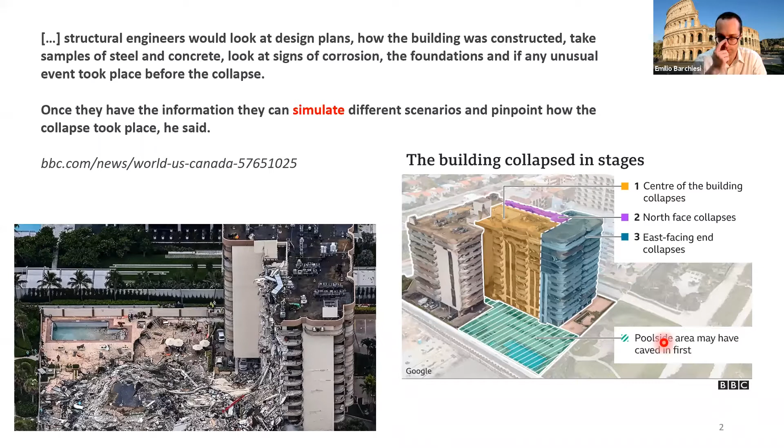I think it's not necessary to explain and motivate why we should study damage mechanics, but just to be on the safe side, note that in 2021 alone, in less than 7 months, we had more than 8 major collapses happen around the world, the last of which occurred just a few days ago in India.

Damage mechanics can help us save not only lives, but also improve our quality of life and reduce the costs related to building maintenance, so that buildings can always be safe for all of us.

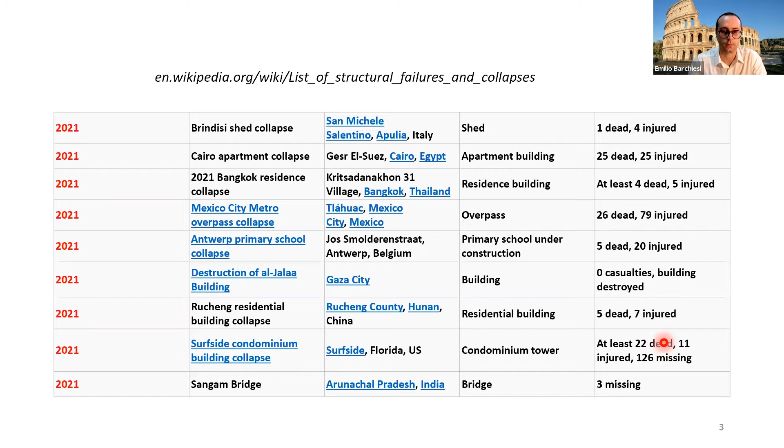So you have seen that these topics have a very close connection with our reality. But is this topic connected in some way to future short-term potentialities in Peru? Well, the answer is yes, because just recently the government of Peru launched a national infrastructure plan, granting 104 billion for the next 20 years to bridge Peru's long-term infrastructure gap. That is the main scope and the main challenge launched by the government.

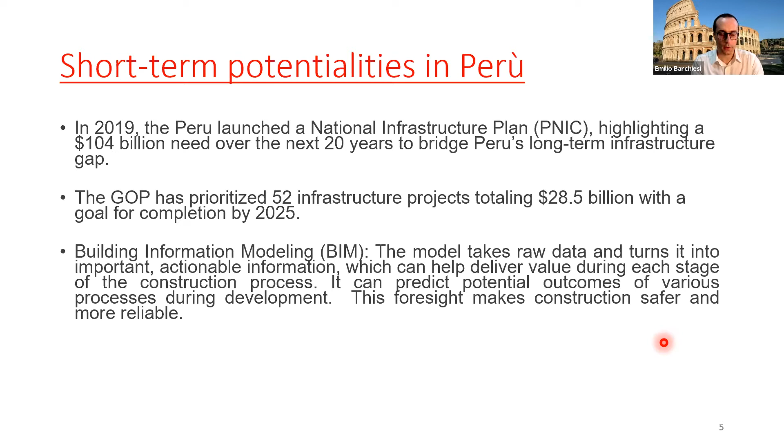In our work on damage, we face some everyday challenges. One main challenge is that damage occurs through a very wide range of mechanisms, because you have cementitious materials like concrete and ceramics. It happens in fibrous materials, either artificial, natural, or biological tissues, that can be part of composite materials, and it can happen in metallic materials like iron, steel, and aluminum.

All of these materials are connected with different applications, meaning different boundary conditions and problems related to the environment. For cementitious materials, you deal mainly with buildings.

If we talk about fibrous materials, you deal mainly with high performance transportation systems, because composites are widely used in cars and airplanes. While if we deal with metallic materials, very often we deal with large infrastructure, like bridges, for example.

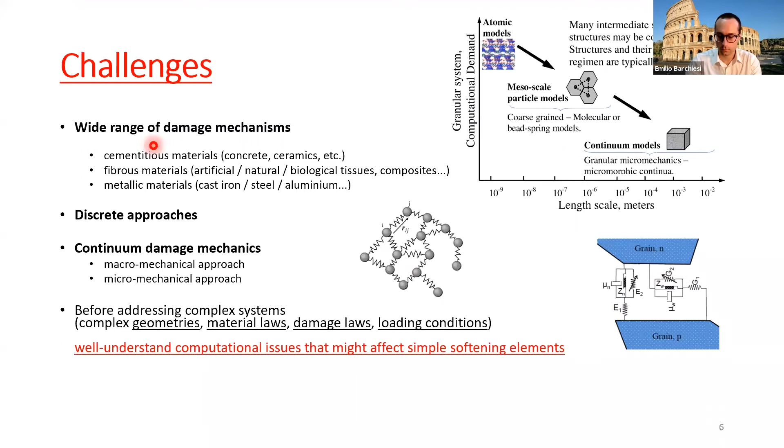So at first, I will briefly introduce the mathematical formulation. We'll deal with a single degree of freedom system with damage. Then we specialize this formulation to a simple damaging Hooke's spring. Then we'll see analytical solutions for such a case.

I'll go very briefly through some numerical methods that can be used to address this very simple system, so that you get a taste of what it looks like doing research in computational mechanics when we deal with discrete systems. Of course, very simple ones, but we work in real life with very complex systems. And then you'll get a taste of how applications look like.

We'll speak about grain-grain interactions, how these interactions can be used to have a discrete modeling of a masonry structure, including the fracture behavior.

Then we'll go through how we deal with brittle fracture using continuous models, and at the end, the more complex model you would be dealing with should you work with us, which is a model derived by homogenization of an elastoplastic damage granular material.

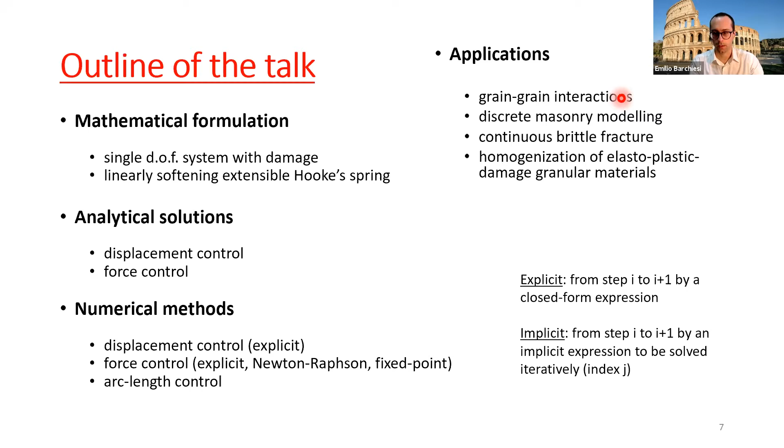So let me just say something in advance. Every time I say explicit, I mean that if we are in an iterative process, we go from step I to step I+1 just by a closed form expression, without doing any further iteration. While if I say implicit, that would mean that we go from step I to step I+1 through a series of steps, so there will be no closed form expression to go from one step to the other.

Well, so let me come to the formulation. Let us consider that time is continuous, which means that time continuously increases from 0 to the time horizon. We have a finite dimensional system having just 2 degrees of freedom. One degree of freedom is, say, u, which you can think of as a displacement. And the other one is the damage, which is simply denoted as d.

So this d is a kind of parameter which is not only expressing the extent to which damage is affecting a material, or in this case, just a system, because this is a global parameter. But it also gives a way to encode the irreversibility of this damaging process.

And how is it encoding this damage irreversibility? Well, through a condition. This condition reads as: damage can only increase in time. So whenever we look for a damage trajectory, which is a law of evolution of damage, we look for an evolution of damage such that damage is only increasing in time.

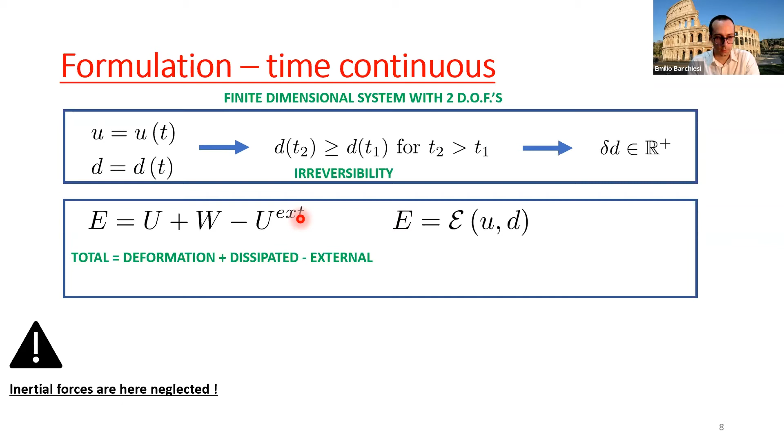Then we equip this system with an energy. As we work in a Lagrangian framework, so we use Lagrangian mechanics, we define a total energy functional for our system. So the total energy functional reads as the sum between the deformation energy of the system and the dissipated energy. Then we subtract from these energies the energy which is entered from the outside, so the external energy, which is nothing but the work done by external forces acting on our finite dimensional system. Note that throughout this presentation, I will neglect inertial forces for simplicity.

So then let me define what is the first variation of this energy functional. The variation of the total energy is nothing but how the energy is changing from a given state, U, D, if I perturb it a little bit. Actually, I perturb it by a very infinitely small quantity, the energy. So I take a state U, D.

I perturb it a little bit with admissible variations, and I see how the total energy is affected by this change. Then I perform the limit for this perturbation, the amplitude of this perturbation, to go to 0, so that we consider this first variation of the energy as nothing but the variation of the total energy for admissible variations of the kinematical descriptors, which are U and D, having arbitrarily small amplitude.

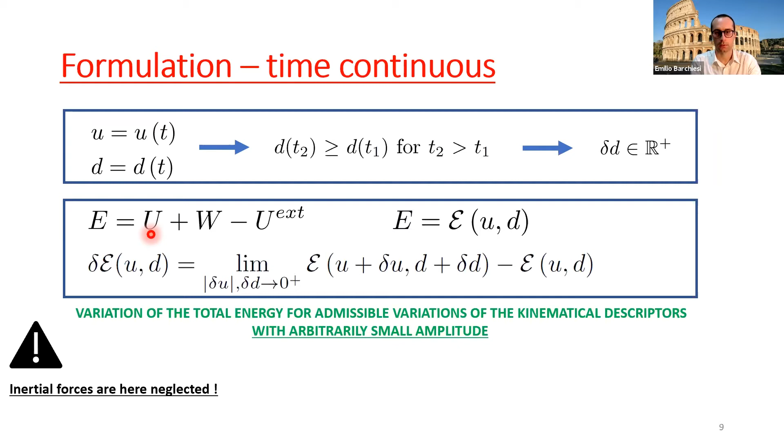Well, at this point, we can introduce, I think, the most mathematical thing you will see through this presentation, which is the maximum energy release rate principle, which states nothing but that the release of energy, which is actually occurring at any time instant of the evolution of the system, is the greatest possible among all the admissible trajectories.

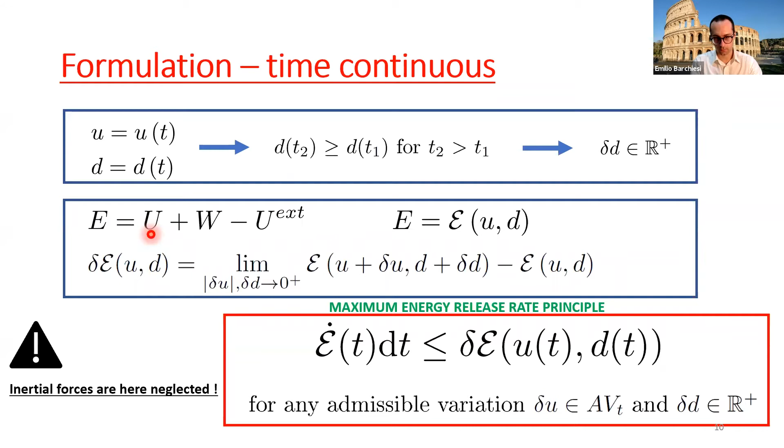So this is just a principle, we accept it as it is. Actually, this principle was formulated in 1948 by Hill in a very famous paper, and all our tractation is framed into this variational principle.

Here we just discretize in time the formulation, which is we define time discrete equivalent quantities to those which I have introduced before. So time just gets discretized into many intervals so that we can use algorithms to solve the problem.

Well, the problem is find U and D such that they verify, for each time instant, this maximum energy release rate principle, which is here.

Now we specialize our tractation to a very specific simple case, which is the case of a classical spring which is linearly damaging. So we choose as elastic energy just the square of the displacement of the tip of the spring, which is the displacement of this point here, while this point here is fixed.

Then this is multiplied by an undamaged stiffness, KEL, and this stiffness is in turn multiplied by what we call customarily in damage mechanics the stiffness degradation function. So if this is damage, when this is 0, the rigidity, the stiffness of this system, is exactly KEL. While when D increases, then KEL decreases until eventually it goes to 0.

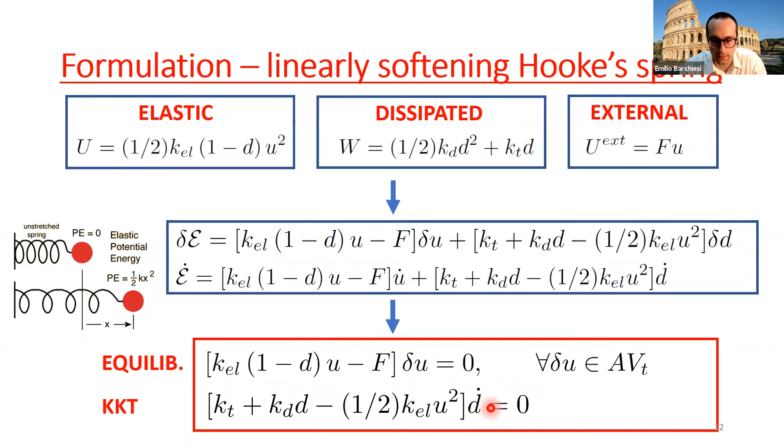Well, but you might argue that it's not given that solving this equation will give an increasing in time damage. Well, that's true. Indeed, if equating this factor to 0 you get that damaging is actually decreasing with respect to the previous time step, then actually damage is not evolving, because we know damage can only increase. And so d dot equal to 0 is entering into play.

Well, so now if you enforce displacement on the right tip, and we call this displacement control, it means that this equation here is automatically fulfilled, because delta U is 0. And then you just have to solve this factor equal to 0 for the damage variable.

Well, this is straightforward, because you just get that D is equal to this guy here, which is the elastic energy without the damage correction, minus KT, which is a kind of threshold parameter controlling the damage yielding, so the onset of damage, divided by KD, which is nothing but a kind of resistance to damage.

The greater KD, the lower damage occurs. The lower KD, the quicker damage evolves. So, well, we enforce displacement using this law: alpha is a positive parameter, t is time, so displacement is increased.

So if we know displacement, we can automatically compute the force through Castigliano's theorem. Here we load the structure, increasing the displacement. Force is linearly increasing until a threshold, which is controlled by this parameter here, KT.

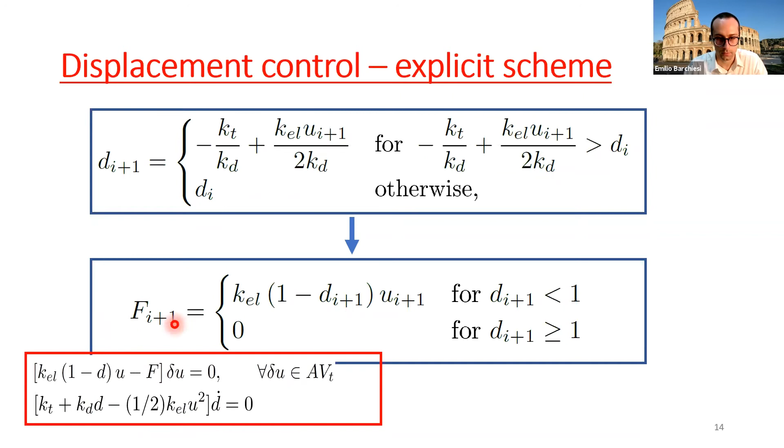So if you have force control, which means you control the force, you apply a force on the right end of the spring, an extensional force pointing toward the right, then you can still find analytical solutions, but these analytical solutions will be a bit more complex.

Why? Because if you solve this time here the damage for the displacement, you get damage as a function of the displacement. But remember that here displacement is not fixed, so you still have to solve for displacement. So you plug the damage that you have found as a function of displacement into here. And you get a third order algebraic equation for the displacement when the force has been fixed.

Of course, a polynomial equation of third order admits three solutions, and not all these solutions might be admissible or even real.

So in fact you get three solutions. Here you have the displacement versus time plot for each of these solutions, which are in green, yellow, and blue. Then you have the damage versus time for these three solutions. As you can see, the blue solution is unfeasible because damage is greater than 1, which is impossible.

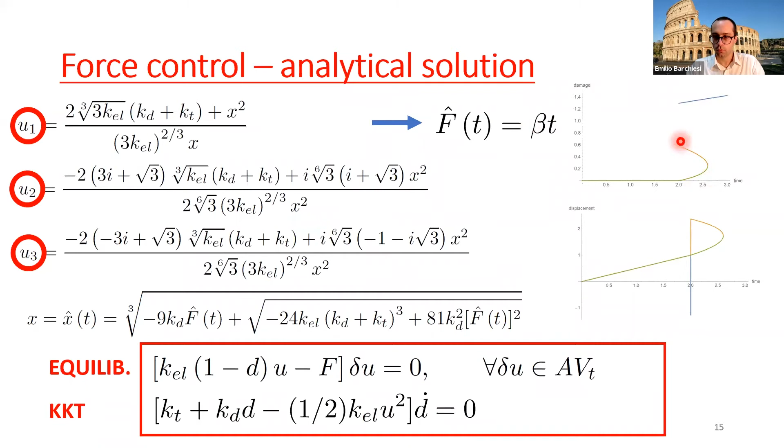Unfortunately, as we are in force control, and this force control has this law, force is increasing with time, we cannot come back because time goes on. But should we have a force such that it can decrease even if time increases, then we could come back here and see the whole solution that we were observing in the previous case, the displacement control.

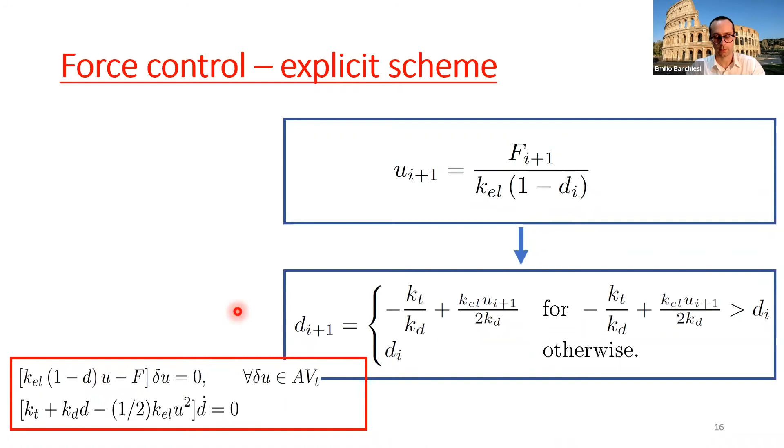So also for the force control, we have an explicit scheme: you fix the force here, then you take damage at the previous time step, and you solve for the displacement. You plug the displacement here, and you compute the damage for the next time step, and then you repeat this iteratively. That's very easy.

I go through these quite quickly, but then we have also Newton-Raphson. You have for sure heard this method in your courses on numerical analysis. Actually, this method should be adapted to the fact that damage is an only increasing function of time. So you just cannot solve a system of algebraic or whatever equations. You should solve a system of equations with not just boundary constraints, but also this irreversibility constraint over the damage.

So you know the Newton-Raphson method just assesses the slope of a residual function, which here I have defined to be just the equilibrium condition, so Hooke's law in our case, normalized by the force. And using this linear approximation that exploits the knowledge about the slope of this residual, it computes an approximation of the zeros of the residuals.

Of course, this method works only locally, as you may know, which means that you converge to a given solution only if you are in a sufficiently close neighborhood of that solution. And as you'll see, this method, because of this, is not very robust, because as the slope...

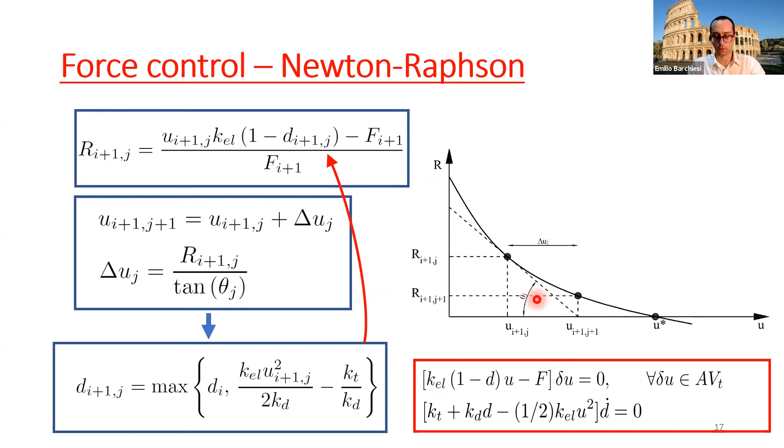Then we have the fixed point - I will just skip this. By the way, the take-home message is just that explicit methods are really the ones which perform worst, while implicit methods, which is Newton fixed point methods, they are the ones which perform better on these kinds of problems, because actually the explicit method has a lot of accumulation of errors which is going on.

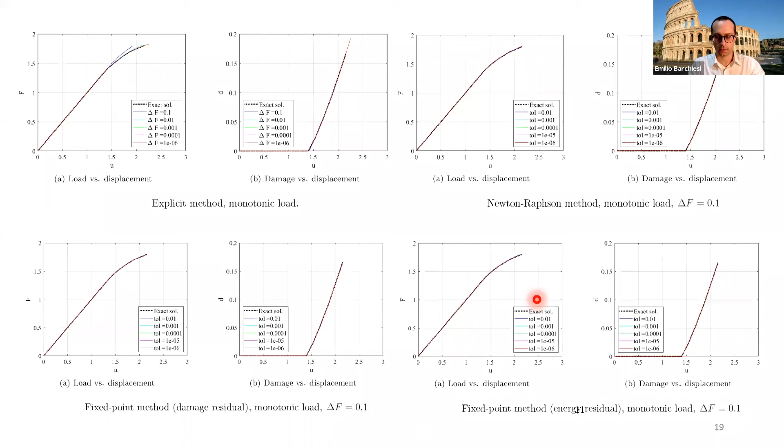So you must refine the step a lot to get accurate solutions, but then refining a lot, you do a lot of steps, and in each of these steps you accumulate some error. This error grows indefinitely until you take unstable paths or get non-accurate solutions. While implicit methods, for each step, do further steps so that you are sure better accuracy is reached even with fewer steps.

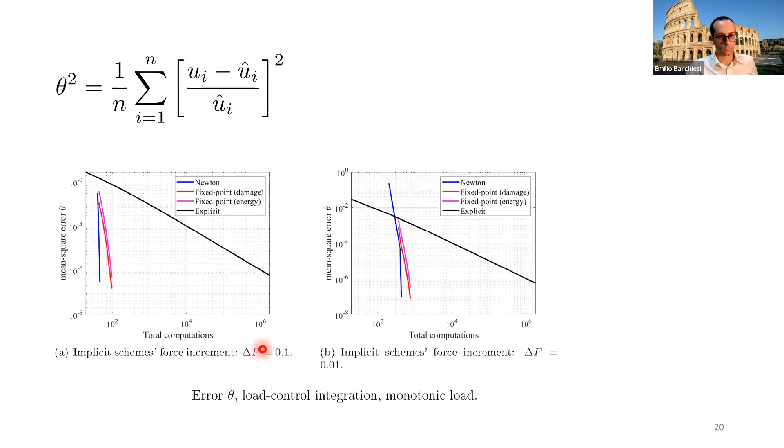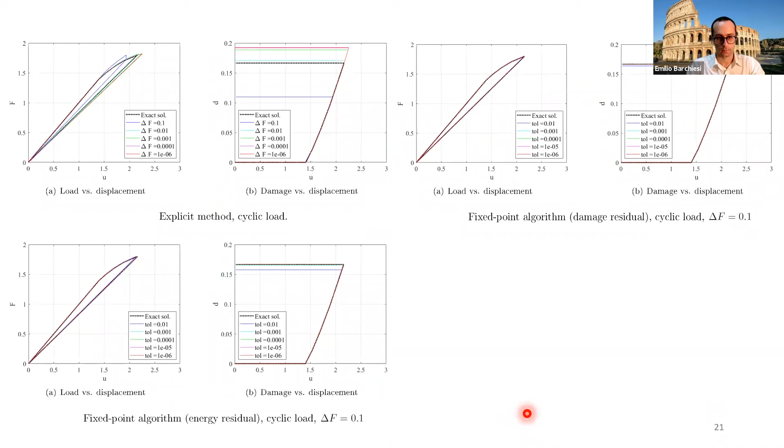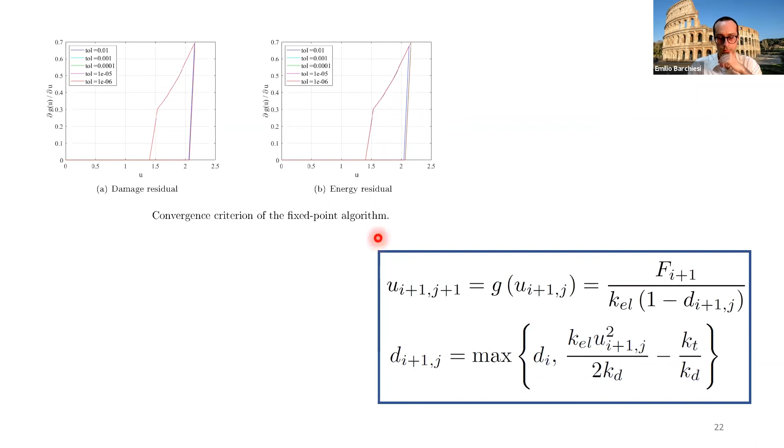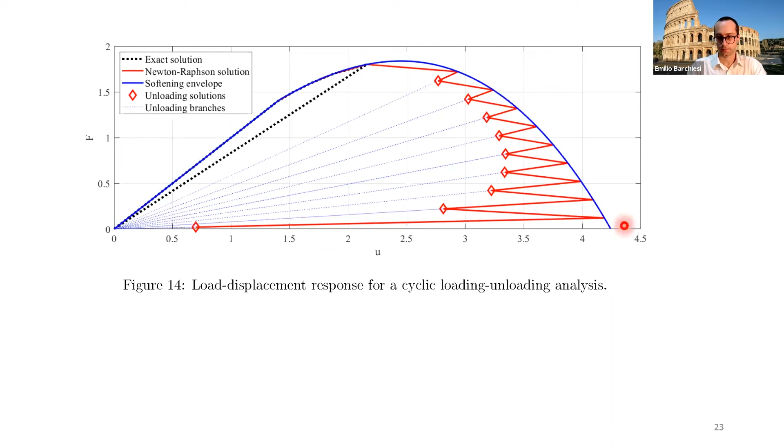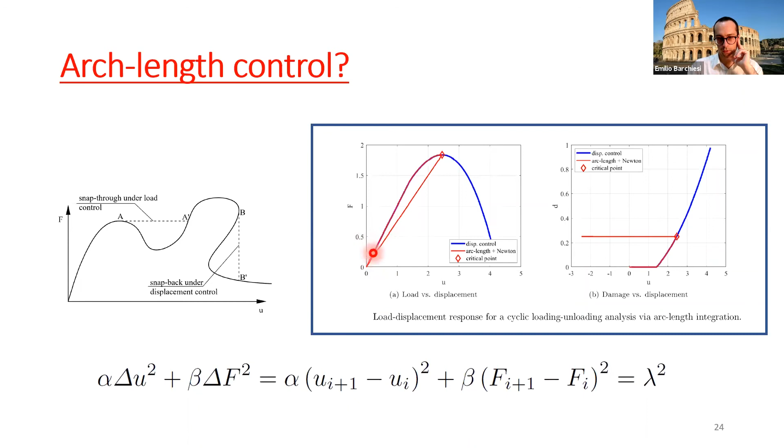So at the end, let me mention that we have an algorithm considered the best for this kind of problem, called the arc length control. Basically, we don't enforce either the force or the displacement; we just enforce the length of this curve. This is equivalent to fixing a point along this curve. We take a circle with a given radius, and look for a point that intersects with this circle, equivalent to approximating this curve with a line, so that this line is actually the arc length of this curve, and then we look for this intersection.

This is a very good algorithm, but unfortunately it is incapable, as it is, of dealing with bifurcations like in this case. While Newton, for its own drawbacks, can go beyond this point - it doesn't catch the unloading branch, but it catches this other branch in force control - you cannot do this with arc length.

While you get the correct solution here, when you have a linear unloading branch, which means cyclic loading, you unfortunately cannot get this softening that leads to collapse. So the arc length method has to be improved to deal with this kind of problem.

To recap, we have a simple damaging spring, and even this spring is challenging for numerical schemes. So it's a very good example, the simplest non-trivial example to assess and get to know all these numerical methods.

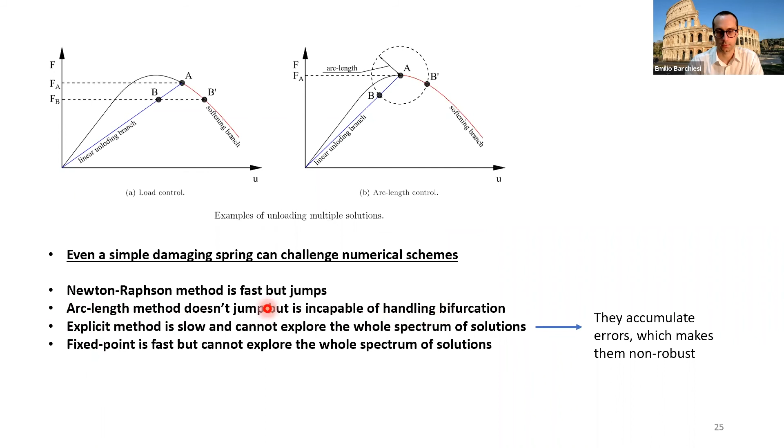Newton-Raphson is fast and can sometimes go beyond critical points like limit points, giving solutions that wouldn't be obtained otherwise, but it jumps, so it is not very stable. Arc length method doesn't jump, but is incapable of handling bifurcation. Explicit method is slow, as we have said, and fixed point is fast, but unfortunately cannot explore the full spectrum of solutions. So that's all about numerical methods.

Now let's come to some applications. I will go very fast on this because I don't want you to get the detail, but I want you just to get an idea about what we do.

We model masonry structures as many bricks aligned over different rows, and each brick is considered rigid, so it is not deforming at all, it's just rotating and displacing. Then we have an elastic mortar between these bricks. Actually this mortar is elastic but also damaging, so after a given threshold, it starts to damage.

We call theta n the rotation, the anti-clockwise rotation angle of a given brick labeled as n, and then un is the displacement of brick n.

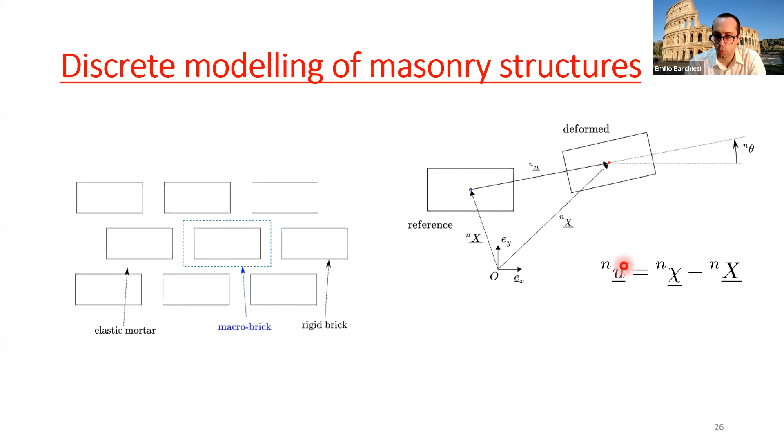Here we have some kinematical quantities that are defined for two adjacent bricks. I'm not going into the details of this.

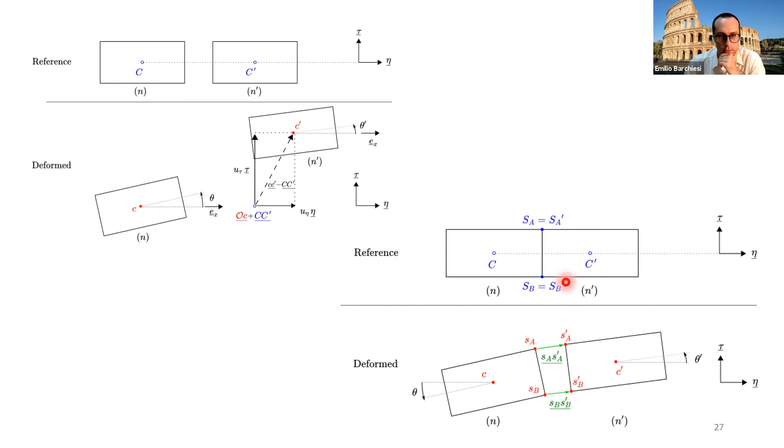What I just want to tell you is that if we know the rotation angle of all bricks, in particular two adjacent bricks, and if we know the displacement of the barycenters of these two adjacent bricks, then we can compute the relative displacement between this point here and this point here, which in the reference configuration lie in the same position.

So what we do is we put here an extensional damaging spring, and here an extensional damaging spring, so that we take into account the relative displacement between these two bricks, and also the relative rotation, because one spring will compress and one spring will extend for a relative rotation of these two adjacent bricks.

Then we also consider two tangential springs. We compute the relative displacement between this point here and this point here, and between this point and this point, using representation formulas for rigid motions. Here you plug in A and B, and you do the same everywhere else. This is very easy, kinematically speaking.

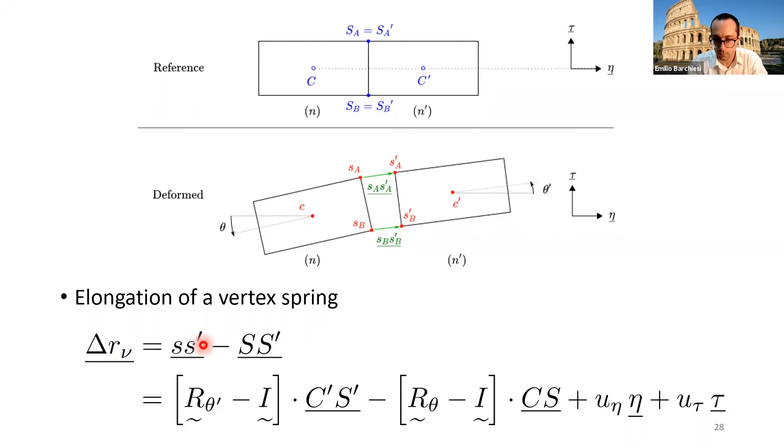Then you define a deformation energy, an elastic deformation energy, with these stiffnesses. Here you have the normal displacement: you take the relative displacement between this point and this point, and project it along the normal to the contact surface between the two bricks in the reference configuration. This displacement is squared to get the deformation energy for this spring.

Again, with nu, you plug in A and B to get the deformation energy of this spring or that spring. Here you have the projection of the relative displacement onto the tangent to the contact surface in the reference configuration, which is the vertical direction. You project the relative displacement along the tangential vector, square it, and multiply by the rigidity factor to get the deformation energy of the tangential and normal springs acting between these points. So we have 4 springs for each interaction, for each couple of adjacent bricks.

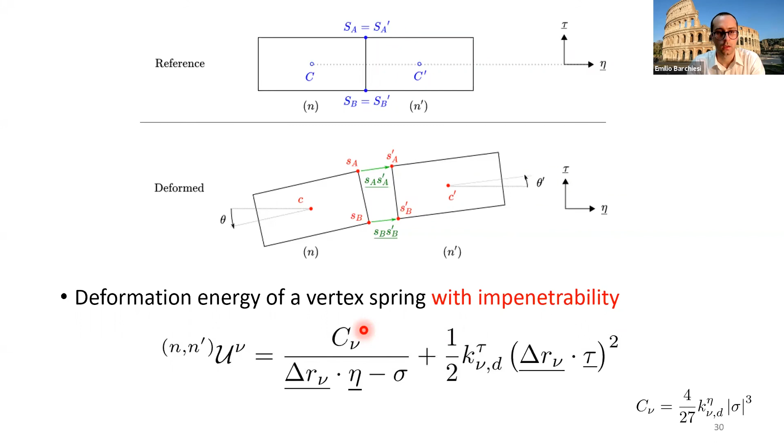But this is a higher order correction. As I mentioned, the rigidities are damaging. And then here we have a correction, which is a surface correction. So these rigidities are larger when there is a high contact surface, smaller when the contact surface is smaller.

Damaging happens exponentially in tension. So we plug in this damage here, and it happens much slower in compression. So we are dealing exactly with a mortar, with mortar as a material between bricks, which is quite realistic.

We have again an exponential law for the damaging of tangential springs. And this factor here, which tells how quickly this exponential will go to 0, is controlled by the stress state of the spring. When the spring is in compression, this will be different than if we are in extension.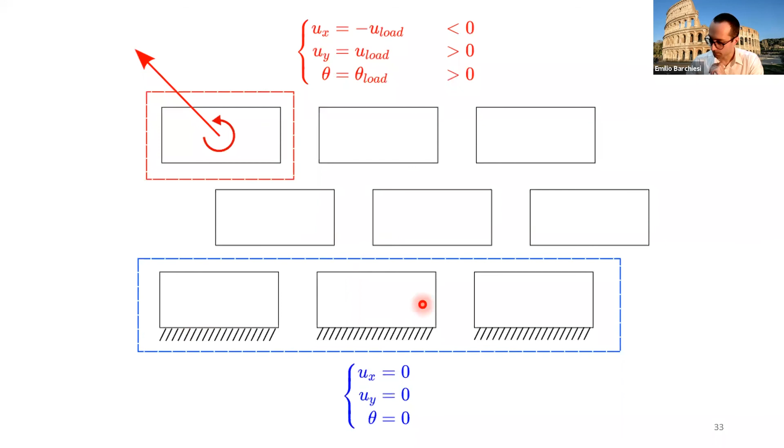It's quite common that if you increase the pressure between two surfaces, then their sliding will be more difficult to achieve. Here, as an example, you displace this point along this arrow, you apply a rotation theta here, and this row of bricks is fixed. Then you start the experiment, so you start pulling, and what you get is this.

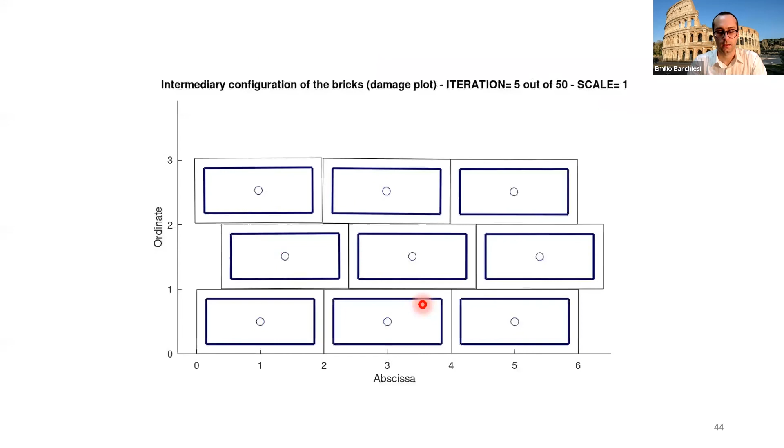Here no fracture is taken into consideration, which means that, let me come back here, you see this damage will never reach 1. It will reach 1 only for an infinite relative displacement along the tangential direction. Also here you will reach 1 only when the exponential goes to 0, which means only when the projection along the normal to the contact surface in the reference configuration of the relative displacement between two adjacent vertices goes to infinite.

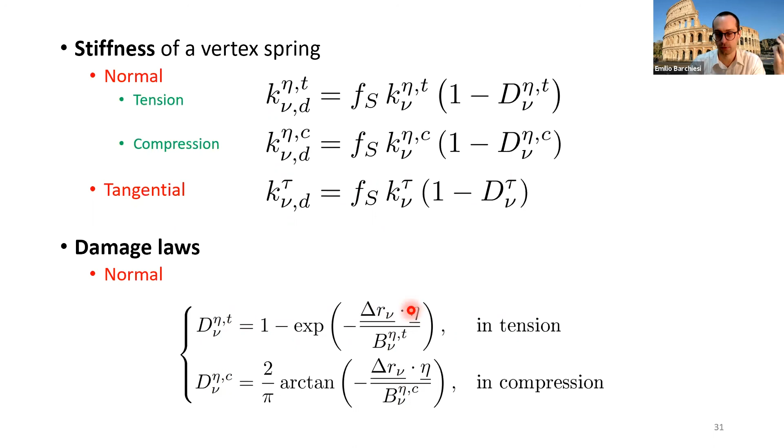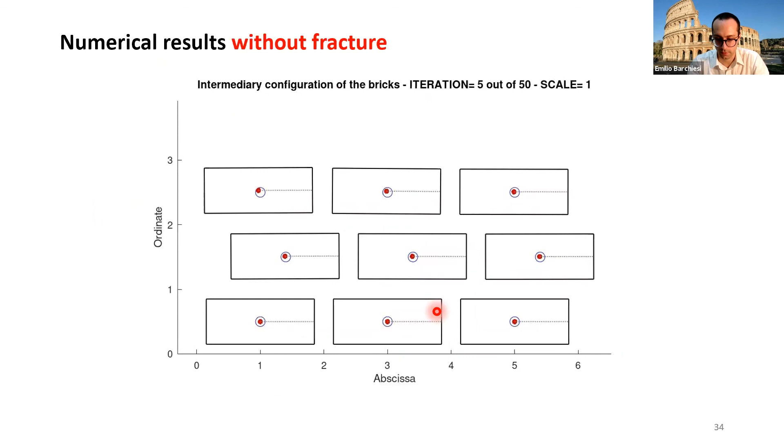This is not realistic, of course, because after a certain point you reach complete fracture. So damage should go to 1 for a finite relative displacement, but here it is not taken into account.

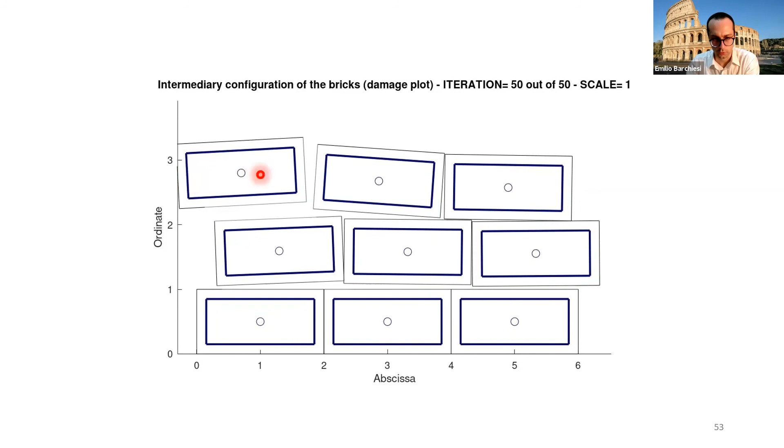You can see that here you have a rotation that induces a rotation of this brick. And whenever you have two adjacent grains or two adjacent rigid bodies, if one is rotating in one direction, say anti-clockwise, then the next one should be rotating in the opposite direction, clockwise. So this modeling is quite realistic in many respects.

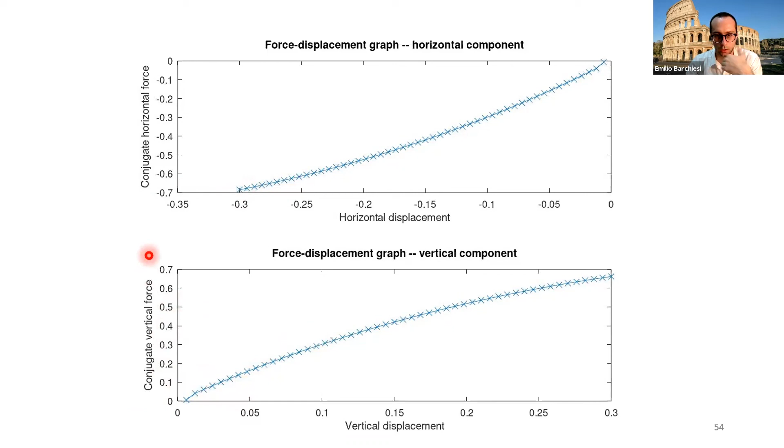But since we don't deal with fracture, you see that along the horizontal direction we have a kind of softening, but don't reach fracture. The same along the vertical direction. So this is just the load displacement curve along the horizontal and vertical directions.

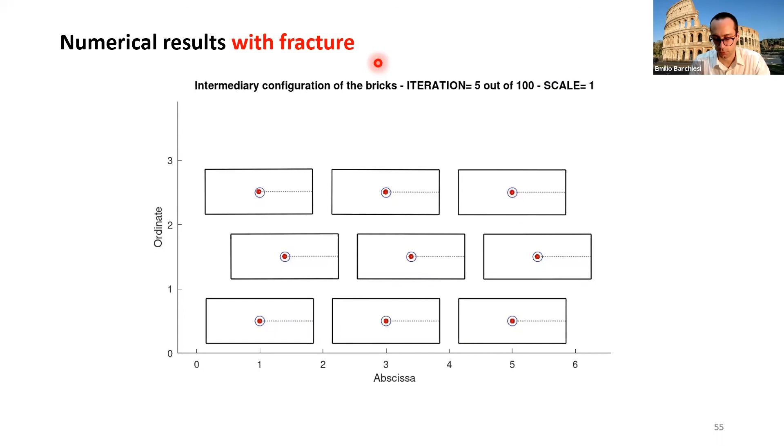Now here we introduce fracture, which means after damage reaches a given threshold, that interaction is cancelled. And when all the interactions among two adjacent bricks are broken, then you really have fracture of the mortar there, denoted by a red line.

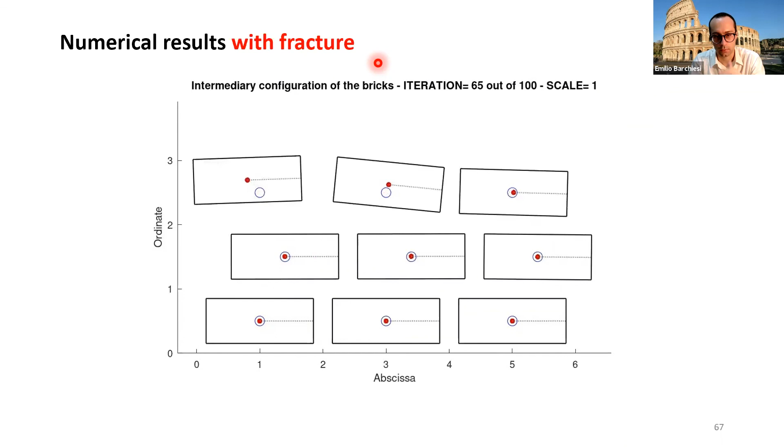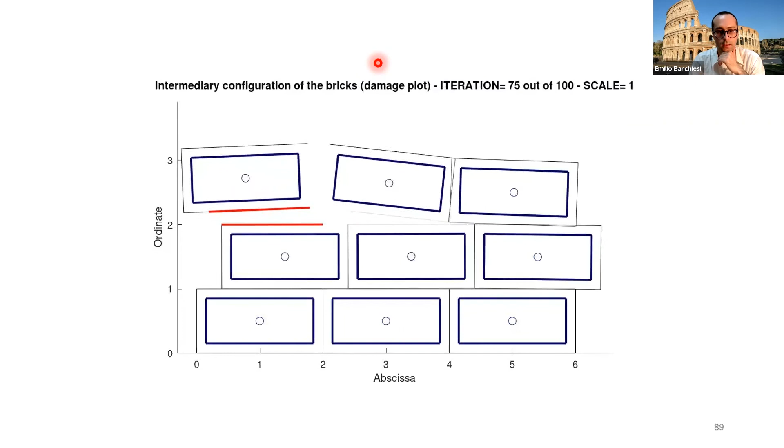So here you see the results with the fracture highlighted. Now very soon we should see fracture, yes, fracture. You see that here fracture has occurred. Here fracture is occurring but still not reached. Here fracture has occurred completely.

And if we look at the force displacement diagram, here we can see an initial softening. Then as before we see a stationary point, called the limit point. And then the force is decreasing until it reaches 0 along the horizontal direction.

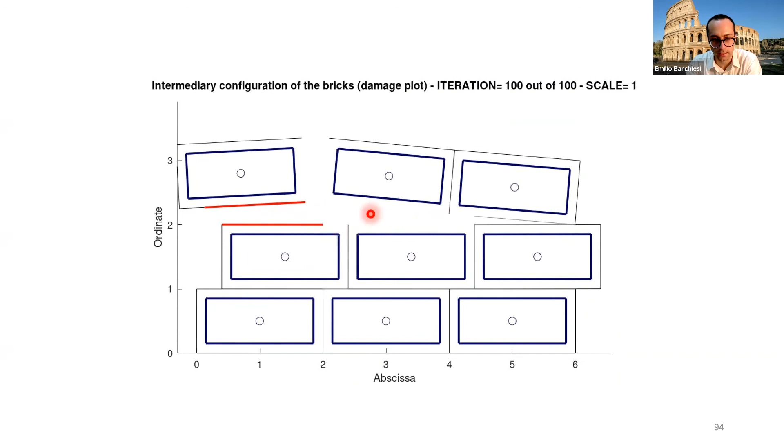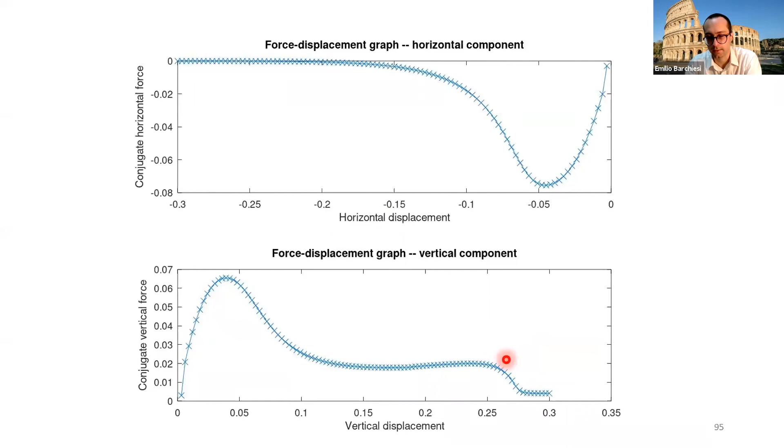While along the vertical direction, a very nice thing is happening. We have the same behavior, except that we reach a plateau because there are still some interactions resisting. But then those also get fractured, and so we see this last attempt that the material makes to resist, because the load has been transferred to other interactions, fails until we eventually get to 0 force.

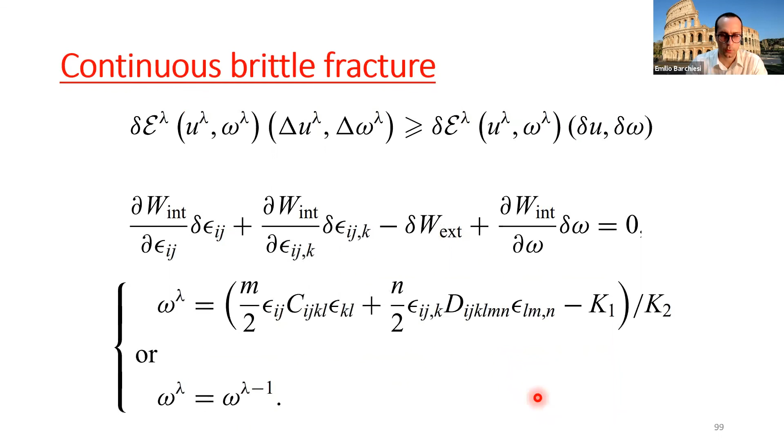So very briefly, we also have continuous models of fracture, based on continuum mechanics. Here we have all the formulas we dealt with in the discrete case, very simple with a few degrees of freedom, but now in an infinite dimensional setting, in a continuum setting.

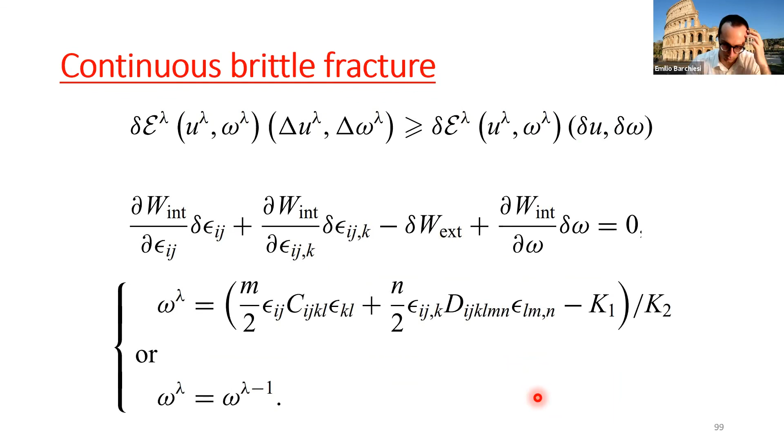Then we have homogenization, so we have micromechanical approaches, which is continuum approaches, based on some modeling at the micro scale. This modeling is not just taking into account damage, as we have seen for the masonry, but we also have plastic interactions. You can have loading and unloading cycles with plasticity.

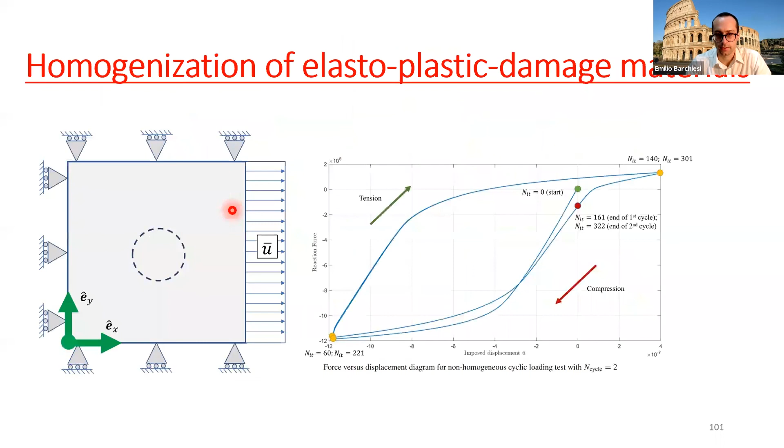This is nothing but the homogenization. So we have transferred to the continuum the description of the masonry that you have seen before. And of course, as damage is different if we consider different directions for each point, this induces an anisotropy, because stiffnesses change with the direction.

So what is important maybe for you is to know what we would do together in the future. We would analyze relevant cases for which there are analytical and numerical results in the existing literature, using the masonry model presented before, so we can check whether it is consistent, better or worse with respect to previous literature, or if it can describe better some real experiment.

We would like to use this masonry model to identify a Cosserat continuum. So we would like to use micromechanical homogenization to homogenize the masonry, including plasticity and rotation of bricks, which has not been taken into account up to now.

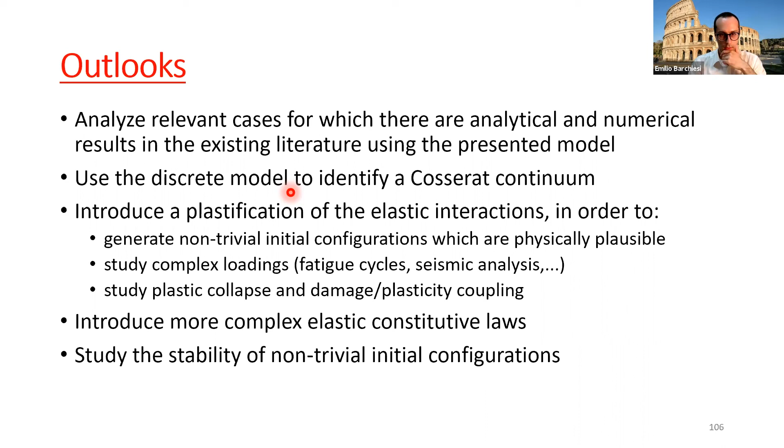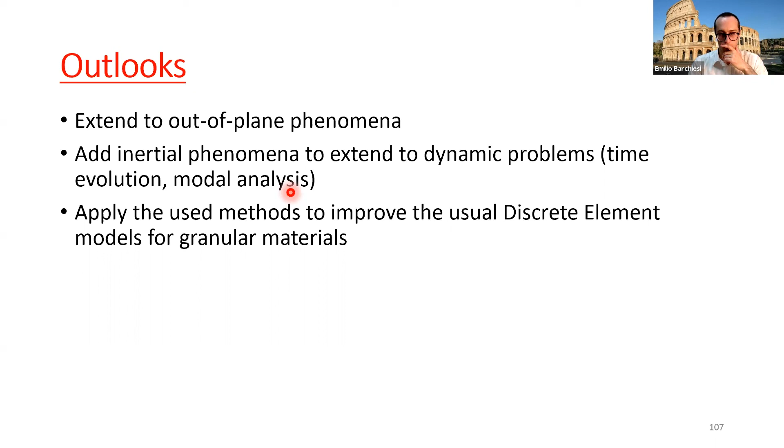As I said before, introduce plastification of the elastic interactions among the bricks in the masonry, introduce more complex elastic constitutive laws, study the stability of the different configurations using these models, study out-of-plane phenomena, add inertial effects, which means kinetic energy, to study dynamic problems like earthquakes, and then finally apply the methods that we have developed to more standard approaches like the discrete element models.

So I thank you for the attention, for having resisted up to now. And please, if you think you might be interested in finite element method, numerical analysis, continuum mechanics, civil engineering applications of all I have presented so far, please take seriously the possibility of doing your thesis within our investigation group at the Instituto de Investigación Científica of the University of Lima. We'll be very happy to welcome you into our group, and exchanges with Italy are also forecast. So thanks for the attention.